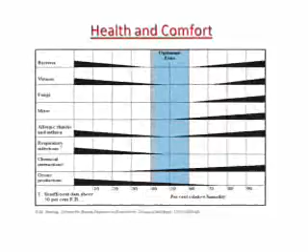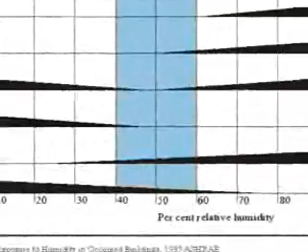If we look at this chart here, we can see that bacteria and viruses thrive in environments with extremely low or extremely high relative humidities. The optimum zone is actually between 40 and 60%, and in this zone, human exposure and the spread of bacteria and viruses is greatly reduced.

Static electricity is another good reason to humidify. In applications such as printing, textiles, or manufacturing, static charges can disrupt operations and increase operational costs. Also, if there are volatile fumes present, static charges can lead to dangerous flash fires or even explosions.

And finally, humidification is important if moisture stability is a requirement. Many materials and products must be kept at the right humidity level in order to prevent damage or deterioration.

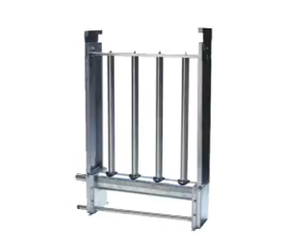One of the most common ways to humidify is to directly introduce steam into the ductwork of a building. This allows the humidity to be distributed to all occupants of the building while using as few humidifiers as possible. However, in doing so, you risk making a consulting engineer's worst nightmare a reality, and that's wetting of the duct. How can we avoid this?

Nortec's SAMI, or short absorption manifold, places a header and a series of distributor tubes directly into the ductwork. This maximizes the interaction between the steam and the air, resulting in the shortest possible absorption distances, so you no longer have to worry about wetting of the duct. So let's head down to the lab and take a closer look at how this distributor works.

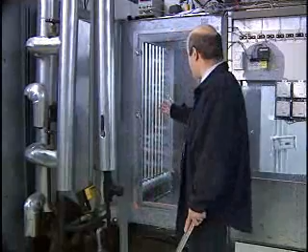Hello, I'm George, one of the design engineers. In the duct is a 3-inch spaced insulated SAMI. This SAMI comes with an adapter for pressurized steam. Notice the globe valve and actuator and the recommended strainer.

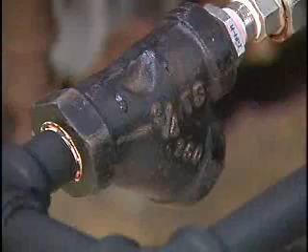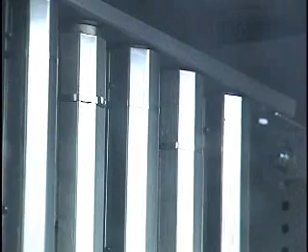Below you will see the condensate recovering system. The nozzles in this SAMI are evenly distributed throughout the duct to ensure that steam fills all corners of the duct. Looking at the cutaway of a distributor, you'll notice that the nozzles extend to roughly the center. This is meant to ensure clean steam is injected into the duct.

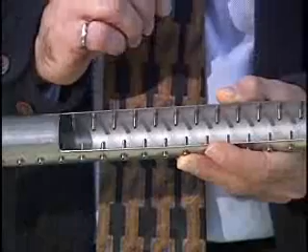The nozzles are also stainless steel and match the distributor tube. Being the same material, it guarantees a proper seal and it guarantees that they don't fall out. Other products on the market have opted for plastic nozzles, which can sometimes dislodge.

You will notice the steam plume, its short absorption distance, and how it gently wraps around the tubes, keeping away from any of the walls.

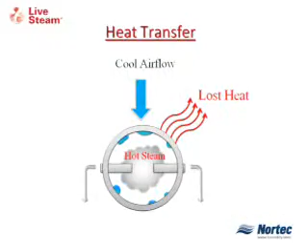As the number of distributor tubes increases, the absorption distance decreases due to the increased interaction between the steam and the air. However, the potential for heat transfer between the distributor and the surroundings is also increased due to the added surface area of the extra tubes. As a result, there may be higher steam losses in the form of condensate or increased airstream heating.

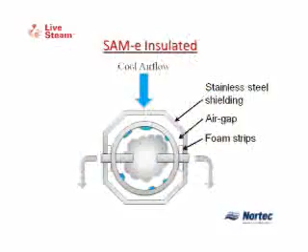So how can we avoid this? One method to reduce the heat transfer from the distributor to the surroundings is through the addition of insulation. However, not just any type of insulation can be used. The selected insulation must have excellent insulating properties, yet still be safe for use in a plenum.

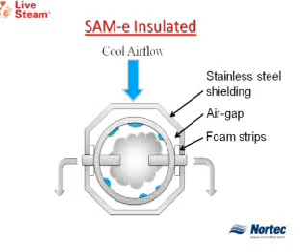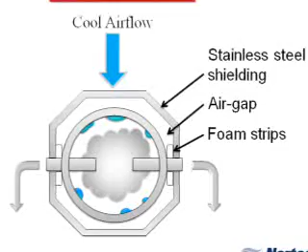Nortec's insulation is made of 304 stainless steel, chosen for its low thermal conductivity, high corrosion resistance, and durability. This design creates a 1/4-inch air gap between the distributor and the shield. Since air exhibits its best insulating properties when it is still, the 1/4-inch air gap is optimal because it's too small for any significant natural convection currents to form.

The air gap reduces the heat transfer from the distributor directly to the shield, and in turn reduces the convective heat transfer losses of the distributor.

Conduction from the distributor to the shield is prevented through the use of plenum-safe synthetic foam strips. This material has high thermal resistance, negligible off-gassing, and low smoke generation in case of a fire. The shields also have a very smooth, reflective surface, which minimizes the effects of thermal radiation.

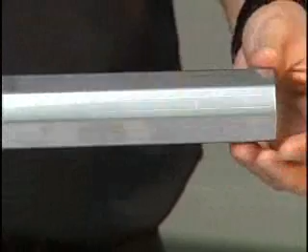So how much of a difference can the addition of insulation actually make? The losses for an uninsulated distributor can be significantly higher than for an insulated distributor. If we want to compare the two, we can define the performance in terms of humidifier output and plot the condensate losses in pounds per hour per foot length against the duct velocity.

So first, let's look at the tube condensate losses. Here the data is plotted for several ambient temperatures over a range of velocities to highlight the effects of both parameters on the overall heat transfer.

You can see that the condensate losses rise sharply for the uninsulated tubes as the duct velocity rises. Losses continue to rise beyond 2,500 feet per minute, indicating that the bare tubes can transfer a significant amount of heat. The insulated tubes, on the other hand, reach an apparent maximum around 1,000 feet per minute.

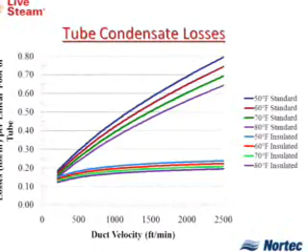This is due to the insulation resisting the flow of heat from the hot steam to the outer wall of the stainless steel shield. Now the header is also a source of losses.

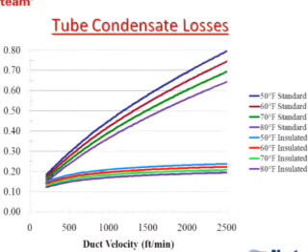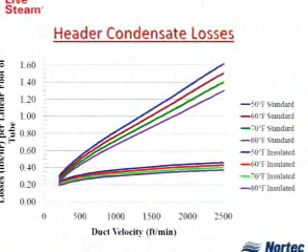The same method can be used to compare the uninsulated and insulated headers. It is clear that the header follows similar trends as the tubes. It is worth noting that the specific losses, which are the losses per foot for the header, are considerably higher than the specific losses for the tubes. This is because the header diameter is greater than the tube diameter, so it has a much larger heat transfer area. So we always recommend insulating both the header and the tubes.

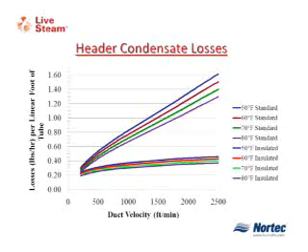So let's take a look at how much money and energy these losses are costing you. Consider a typical steam distributor installation with the following design conditions.

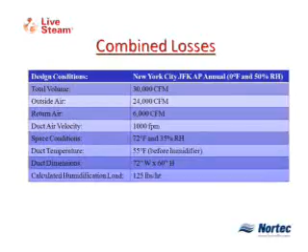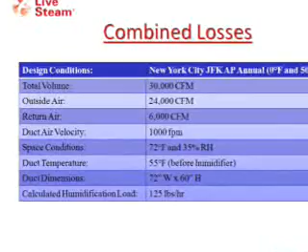New York JFK Airport with a total air volume of 30,000 CFM, a duct velocity of 1,000 feet per minute, a duct temperature of 55 degrees before humidification, and duct dimensions of 72 inches wide by 60 inches high. All of these conditions combine to give us a total humidification load of 125 pounds per hour.

So first, we find the size and quantity of the distributor tubes required. Since the duct height is 60 inches and 12 inches must be deducted for the header height, 48-inch tubes are required. At 6-inch spacings, a total of 11 tubes will be required. We then calculate the total linear length of tube by multiplying the number of tubes by the length.

From the graph shown earlier, at 55 degrees Fahrenheit and 1,000 feet per minute, uninsulated tubes would lose 0.44 pounds per hour per linear foot. By multiplying by the total length, we find the uninsulated tubes would lose 19.4 pounds per hour of condensate.

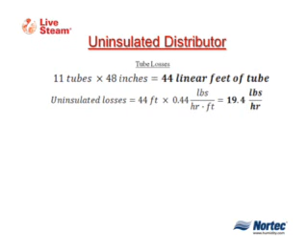Likewise, the uninsulated header would lose 0.8 pounds per hour per linear foot. Approximating the header length as the duct width, we find the uninsulated header would lose 4.8 pounds per hour of condensate. So in total, the entire distributor would lose 24.2 pounds an hour of condensate.

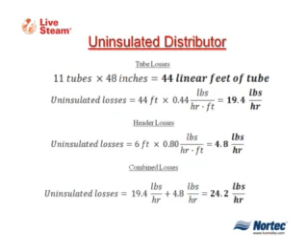Now applying the same calculations to the insulated distributor, we find a combined loss of 11 pounds per hour of condensate. So at full system output, uninsulated losses would represent almost 20% of the system output compared to only 9% with the insulated losses.

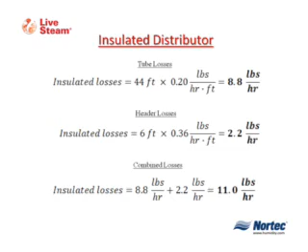The average humidification season lasts from late September to late April and involves roughly 2,000 hours of humidifier operation. Operational costs can be quantified in terms of operational costs required to generate the lost steam.

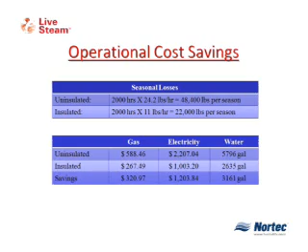The two main energy sources in steam generation are natural gas and electricity. In the case of natural gas, every cubic foot burned in a combustion process will generate roughly 1,000 BTUs of heat. In 2008, the average commercial price of natural gas was $11.31 per 1,000 cubic feet.

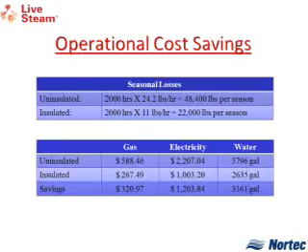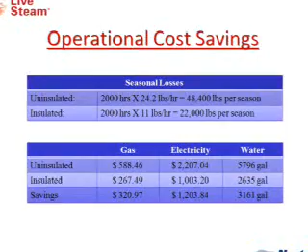In the case of electricity, a typical steam humidifier will consume roughly 0.38 kilowatts of electricity per pound of steam generated. In 2008, the average price of electricity was 12 cents per kilowatt hour. In addition to these energy charges, there are also charges for the delivery and disposal of water used in humidification.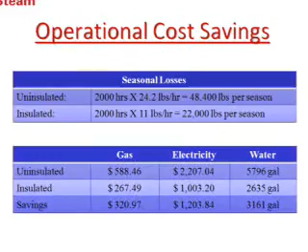The cost advantages of the insulated distributors are clear from this example, with annual savings of hundreds of dollars in gas, or thousands of dollars in electricity, and thousands of gallons of water. Often, the additional cost of insulation can be recovered within 12 to 16 months of operation.

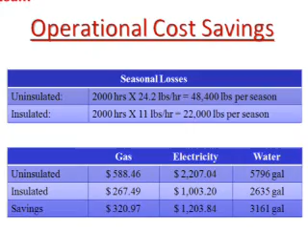There are many additional benefits to using stainless steel air gap insulation. The design of the shield has an aerodynamic profile, which reduces the skin friction and the aerodynamic drag. So in most flow conditions, the addition of insulation will have a negligible effect on the static pressure drop.

Also, the smooth finish of the shield tends to shed dust and dirt, preventing it from accumulating. Other types of insulation, including foam wraps, can absorb dust and dirt and harbor potentially dangerous microorganisms.

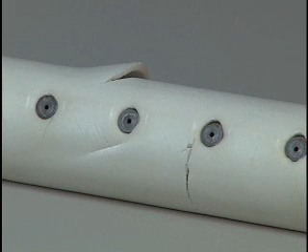The stainless steel shields are also very durable and can withstand shipping, handling at the construction site, and installation into ductwork, all while maintaining its shape and appearance. Foam and ceramic type insulations can be easily damaged during shipping and installation, causing delays and increased costs.

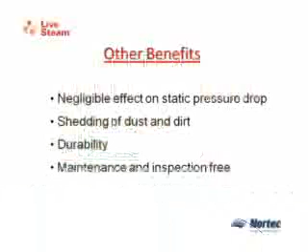And finally, like all SAM-e components, stainless steel air gap insulation is maintenance and inspection free and designed to last the entire life of the unit.

Insulated steam distributors are an attractive option for new construction or building retrofits. In today's increasingly energy conscious world, and with energy costs on the rise, they are an easy and effective way to reduce building operational costs and increase efficiency in any application.